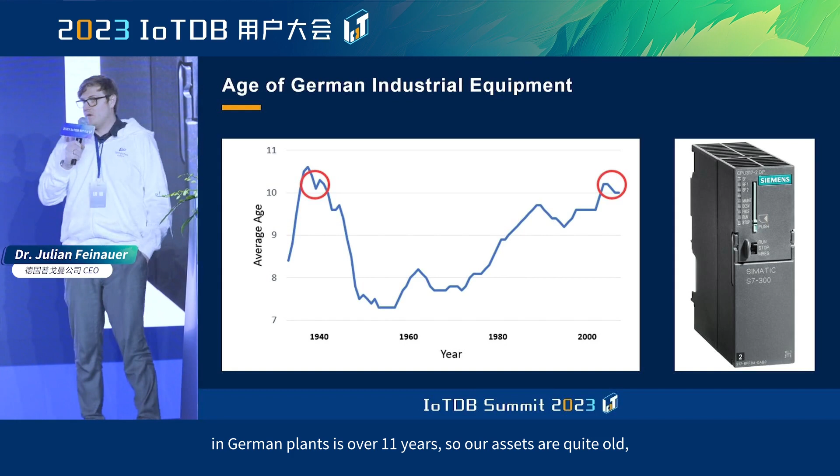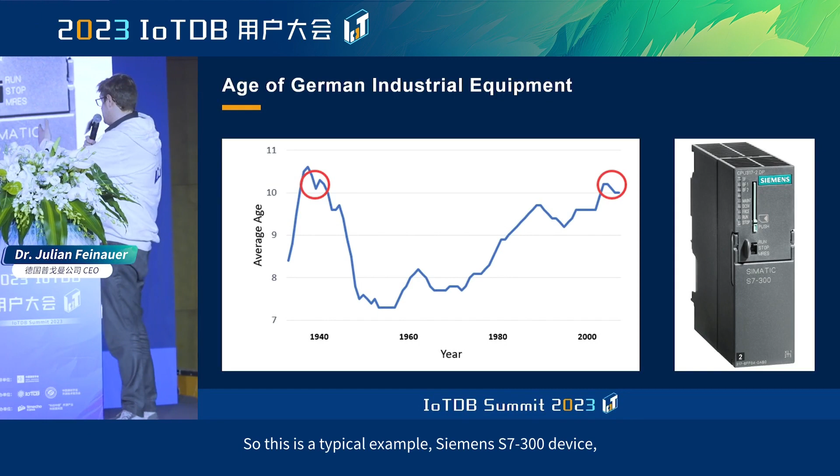The second slide here is the age of typical German machines in our plants. The average age of the machinery in German plants is over 11 years. So our assets are quite old, which has the downside that the control systems in those machines are very old. This is a typical example, a Siemens S7-300 device, which is very common in those machines, and it's very hard to interface with these devices and collect data from them.

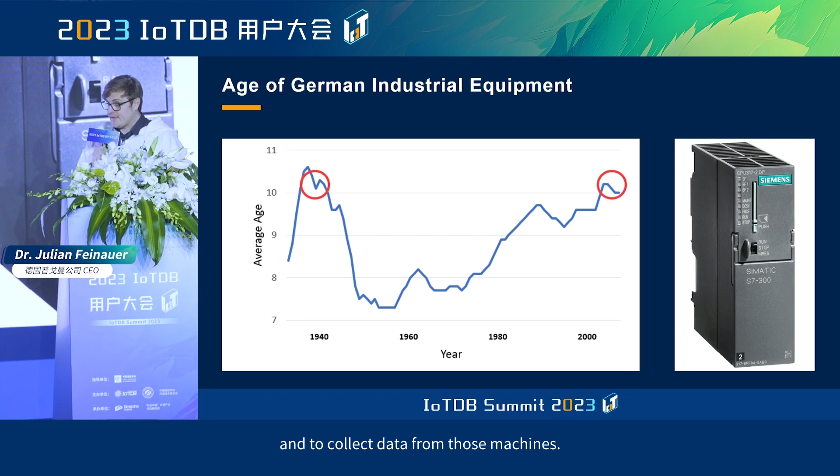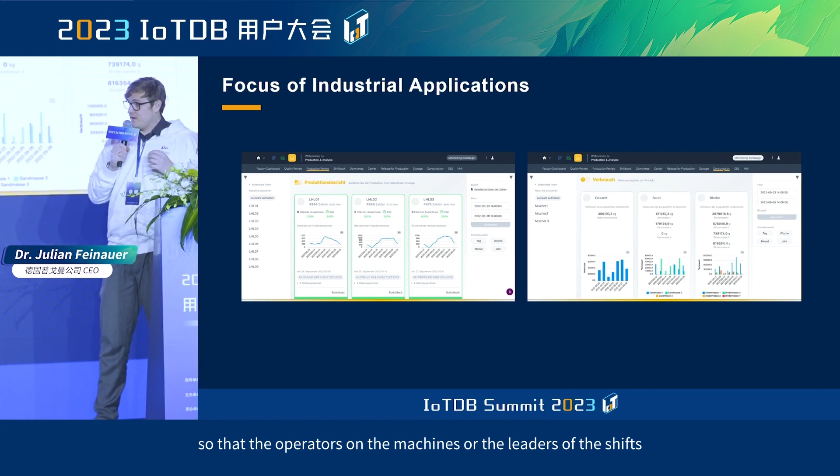The last aspect, for me it was really interesting to see how many use cases in the Chinese industry really focus on the data in depth, because a lot of companies in Germany don't have designated data scientists or people able to work with raw data. So we usually have to aggregate the data quite a bit so that the operators on the machines, the shift leaders, or the plant managers get their information out. This isn't something typical German companies do by themselves. These are typical examples of the results we have to provide, just some numbers about throughput, efficiency of the factory, and things like this.

This leads me to the next point. We do not focus so much on the raw data, and sometimes we don't have that much data. For us, it's more important to have a nice integration, full stack, so that we're able to provide our customers with exactly what I said: from data collection up to calculated metrics and KPIs that they're interested in to run their plant more efficiently.

Usually when you develop this kind of solution, you need very basic things: user management, asset management, and of course data management for the time series data we collect. We need some kind of analytics system or calculation of metrics. And it's quite important for us to have nice visualization, suited not only for experts but for regular people who don't look at these kinds of charts daily.

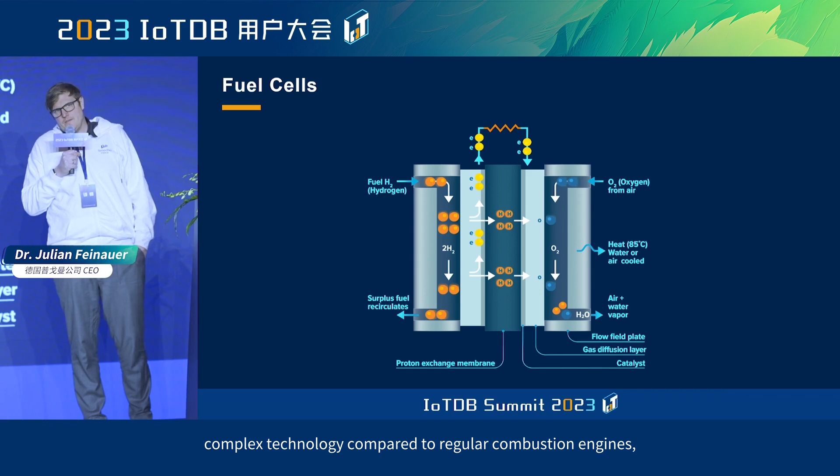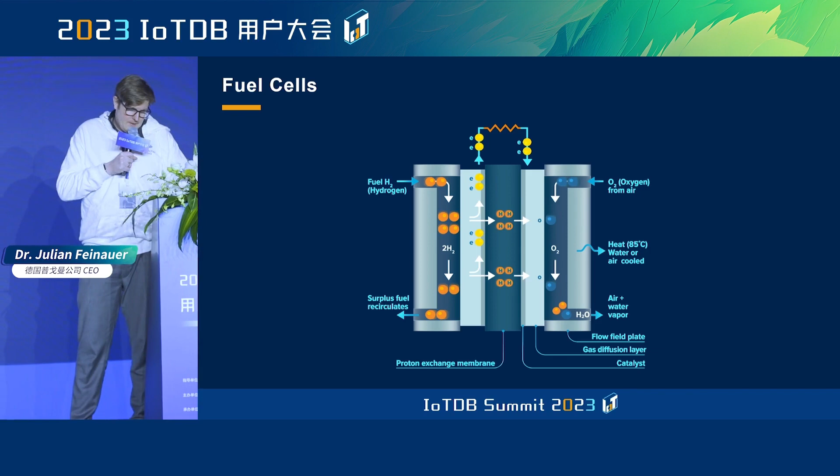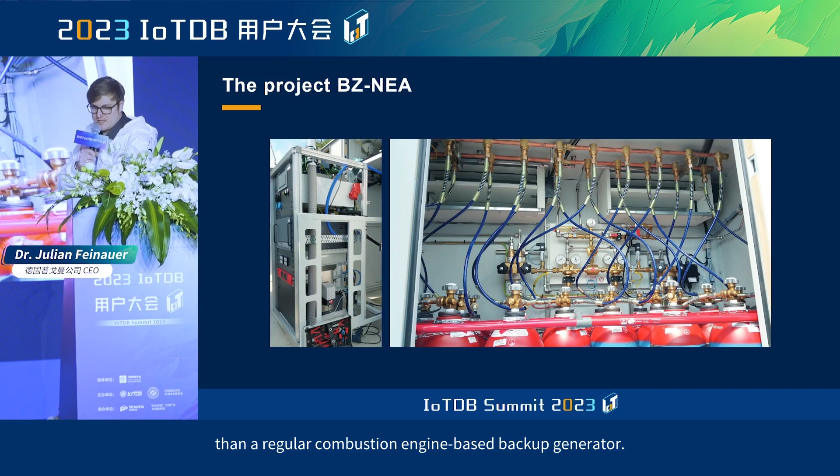And as some of you might know, fuel cells are quite a complex technology compared to regular combustion engines, which we've used for more than 100 years. So we have to manage different kinds of media, and we have to take care of many operation parameters, which makes it very important in this case to have good monitoring. This is another example, and this looks at least way more complex than a regular combustion engine-based backup generator.

And before I go into the details of the solution, there's another thing in Germany. You might know that in Germany we have many regulations regarding data protection, GDPR, but there's also another kind of regulation which is important here, called KRITIS. KRITIS is a term which roughly translates to critical infrastructure, with very special regulations for all software that is used in critical infrastructure. The German train system is considered such an area—it's considered critical infrastructure. So we have special requirements regarding security that we have to meet.

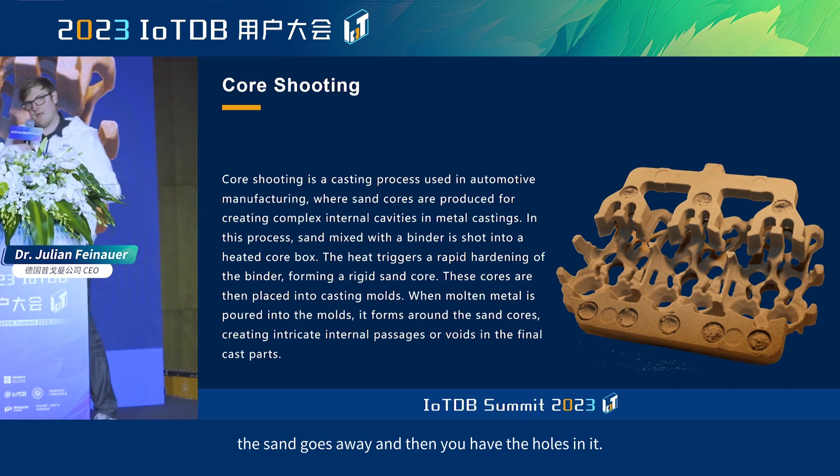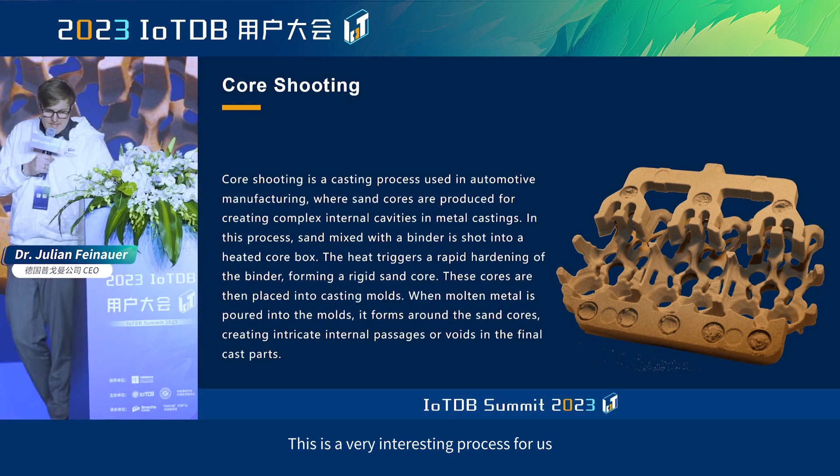So this is a standard procedure for everybody who knows low pressure casting, and this is a very interesting process for us because it's a very complex process.

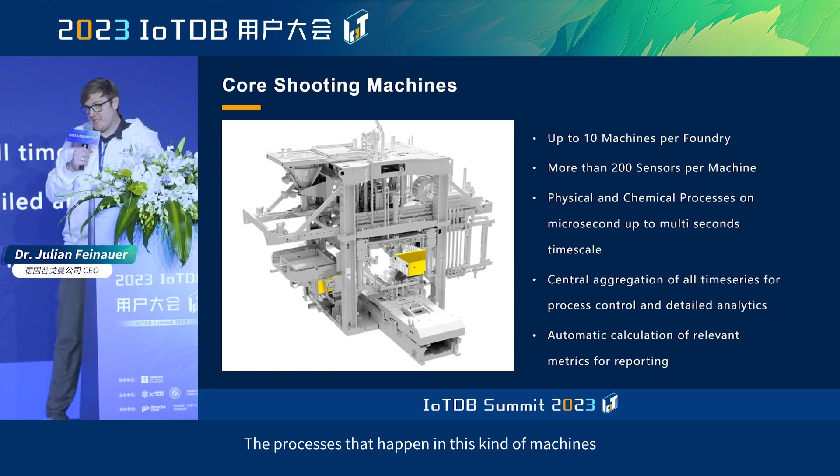In one single foundry line, we have up to 10 of those machines, called core shooting machines, which basically produce those sand cores. Those machines have over 200 sensors. The processes that happen in these machines during the shooting process are physical and chemical processes, so there are chemical reactions, but also high physical influence, like temperature and pressure.

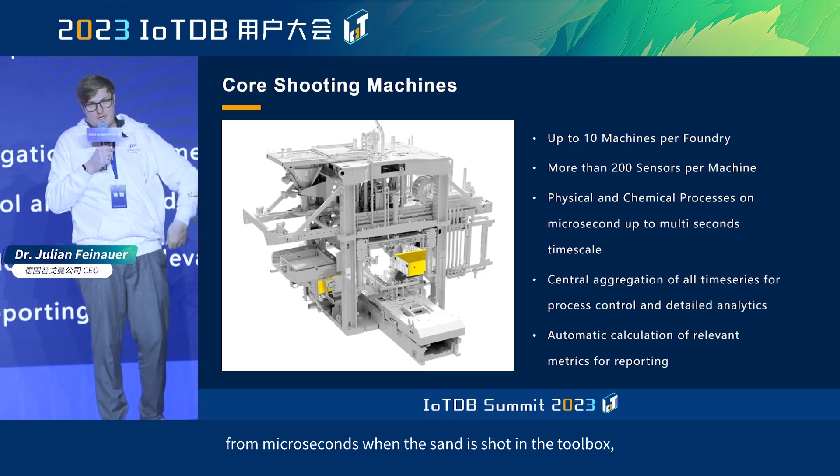Those processes happen in several time scales, from microseconds when the sand is shot into the toolbox, up to several seconds or even several hours when the sand is treated afterwards in a cooling process.

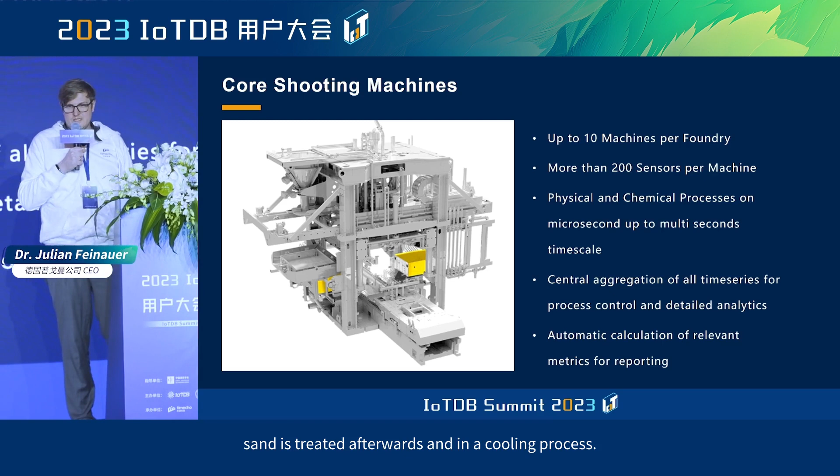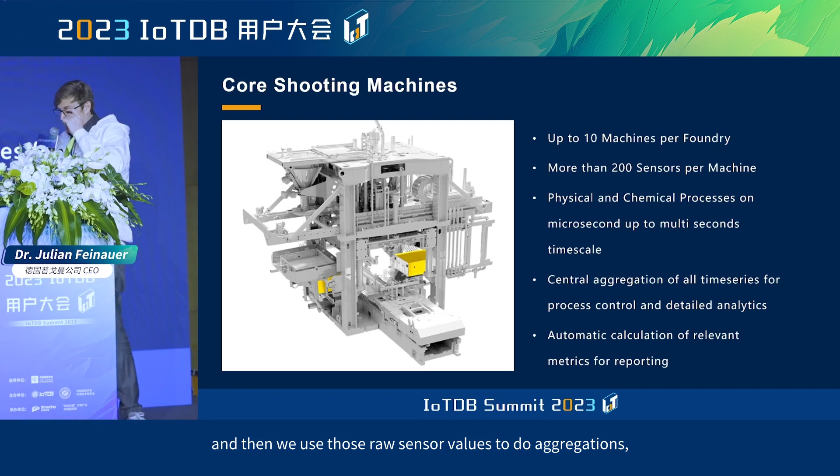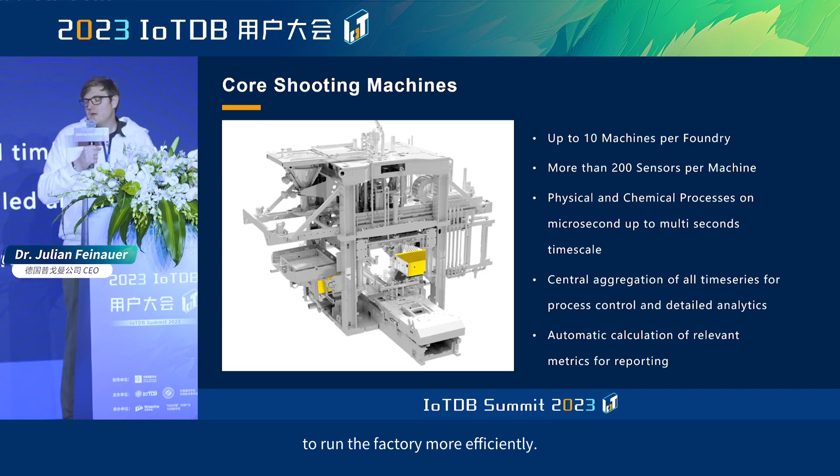What we do here is a central aggregation of all those time series, and then we use those raw sensor values to do aggregations to provide metrics which help the people run the factory more efficiently.

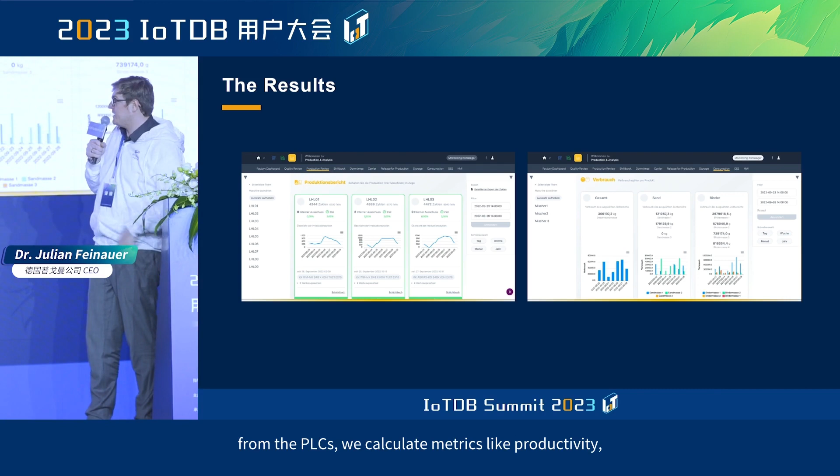So this is a picture I've shown you before. Basically, this is the result of the analytics we do. Based on the information we get from the sensors, from the PLCs, we calculate metrics like productivity and quality-related metrics. We also generate several reports about the manufacturing process, which are used for quality inspection and quality control.

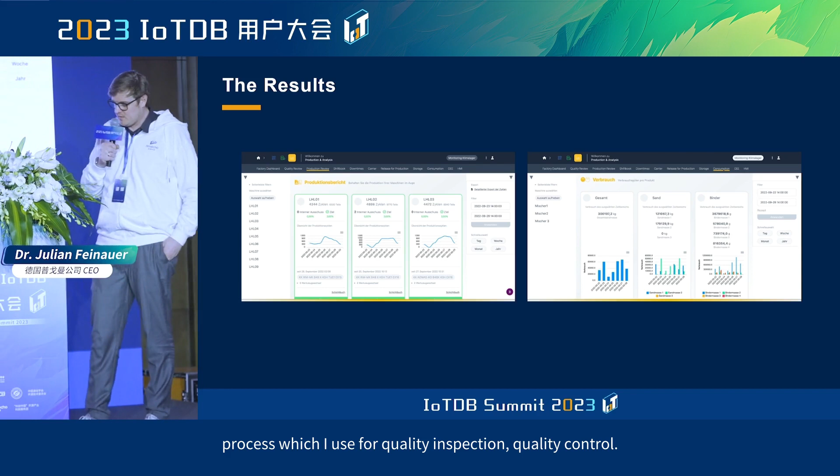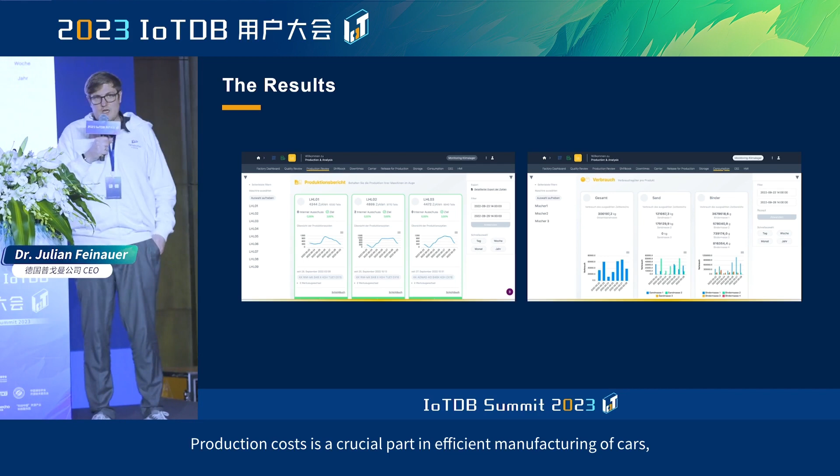Another aspect which is quite important in the automotive industry is that it's pretty much all about production costs. Production costs are a crucial part in efficient manufacturing of cars, so they do pretty extensive calculations.

During this core shooting process, you have several media that you use: water, compressed air, energy, sand, and some chemicals or additives. Up to now, they just did a global calculation of how much material they used over a week and how many parts they produced.

Now we have the possibility to drill down those values on every single core shooting process. So if one part or one type of core is more likely to fail or break because it's more brittle or perhaps more complex, it will consume way more sand because some of those cores have to be thrown away.

This is a module which is quite important because on a daily basis we generate all those reports to say which order, which part, which sand core consumed how much energy, media, and so on, which is then used for pretty strict calculation about the costs of the manufacturing process.

Another aspect we do here is from the parameters we read from the machine, we know things like which toolbox is equipped on the machine, we know the quality of those sand cores, and the exact treatment of the sand cores. So we can use this system also to control processes that happen later.